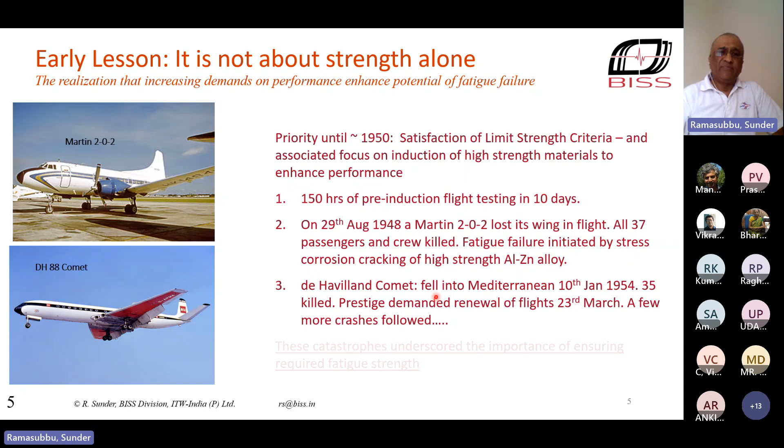You all remember, I'm sure this is an example cited very often, about the de Havilland Comet, which was the first jet transport aircraft, developed by a company in the United Kingdom, that eventually turned out to be a catastrophic experience because it took off with a lot of fanfare. We had the first crash in January 1954, killing everybody due to explosive decompression in flight.

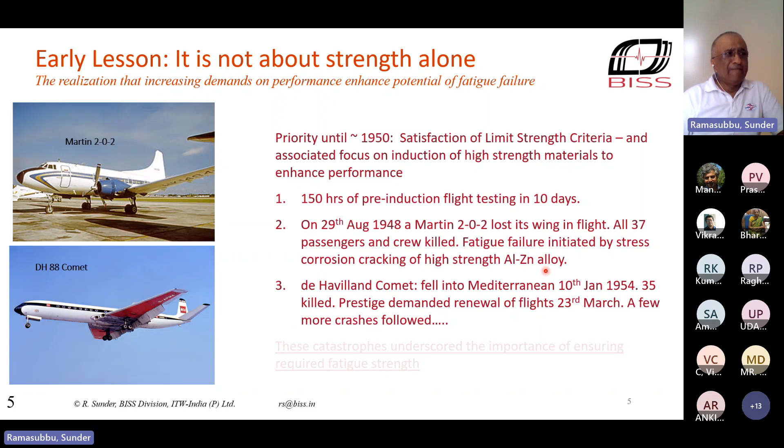Prestige didn't allow the company to stop flying without finding out what went wrong, and another plane crashed. So it followed that there was a fatigue problem with cracking of the fuselage due to the pressure cycles, because it was a pressurized aircraft flying at high altitude. So these essentially involved cracking for two different reasons.

The first one had to do with stress corrosion. The second one had to do with poor design and fatigue.

But I must note that if you look at the documents and lectures about the Comet, the discussion is about square windows and how a fatigue crack would take off from the corner. But actually, the catastrophes happened and testing showed there was a hatch right above the cockpit that used to break up. That was also a window, but it was not one of the passenger windows typically shown in pictures.

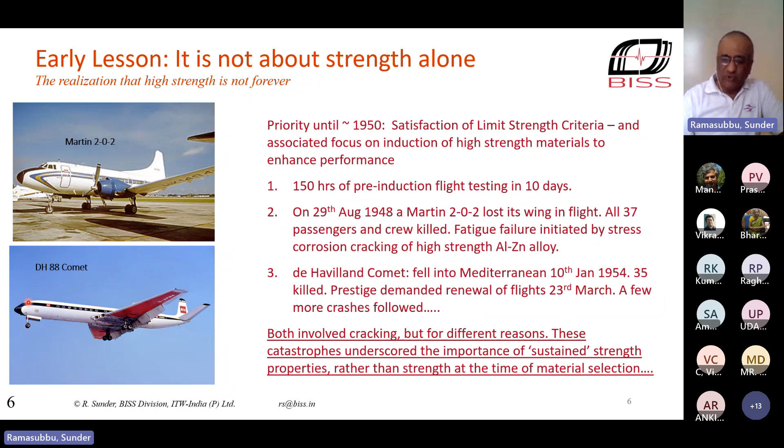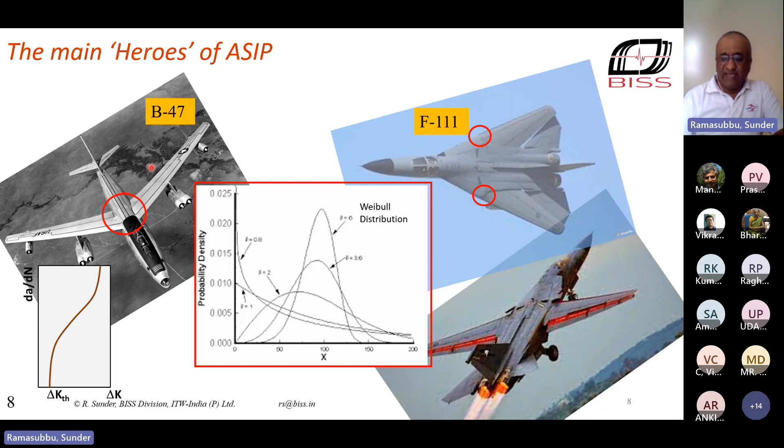So these were the lessons that led up to what happened a little later on, and we have the experience of the U.S. Air Force, which was the largest user of aircraft, not the producer, but the customer for aircraft. They had the real true heroes of the background for what forms the foundation for aircraft design today and for all safety critical structures, not only aircraft, but in the nuclear industry, the power industry, even in wind energy today. We use the same concepts that came down from heroes like this, which I will talk about in this part of the lecture: the B-47 strategic bomber, and then the F-111.

This B-47 was a very important aircraft. About 2,000 of them were built, and it used high strength materials in design. The specific salient feature of this aircraft was that it was the first high-speed swept back wing. You can see the wing swept back like on modern aircraft, a very sleek wing that used to see severe fatigue loads because of the flexure of the wing, and the center plane of the wing, shown in this region, would have fractures in flight.

We keep talking about certain aircraft which we consider to be extremely unsafe, but just imagine that on this aircraft, out of the 2,000 that were built, about 200 crashed because it was a strategic air command aircraft carrying nuclear weapons. Some of them actually were shot down over Soviet territory, over North Korea, I think even off China in those years. But those shot down were hardly 5 or 6. 200 were lost, mainly due to fatigue fractures at this part.

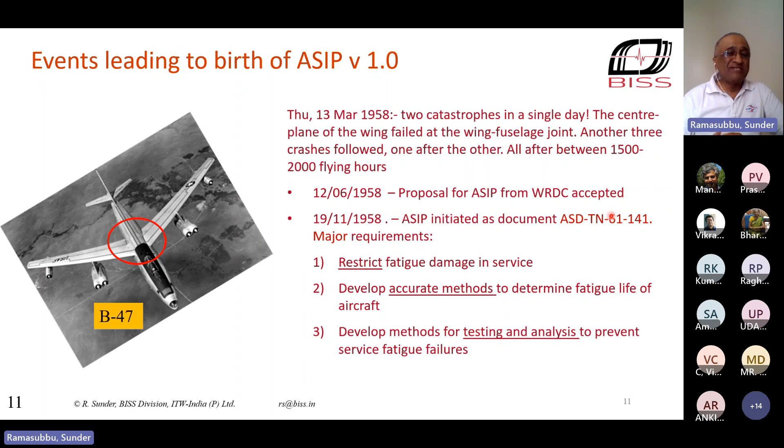The first requirement was that you have to restrict fatigue damage in service. He didn't say how you do it, but he said you have to do it, because until then aircraft were never tested for fatigue, only designed for strength. So imagine if you're an engineer who always uses ultimate stress, or at best yield stress, and now somebody tells you that you have to use a stress associated with the fatigue process. That becomes a kind of intellectual challenge for somebody with no experience in that. But that was the challenge posed by the first ASIP document.

Then the second recommendation was to come up with accurate methods to determine the fatigue life of aircraft, another interesting challenge. And the third was to develop methods for both testing and analysis to prevent service fatigue failures. So this was the first suggestion that an aircraft, before being allowed to fly, had to go through a process of full-scale fatigue testing. And of course, at that time, it was not really clear how you go about it.

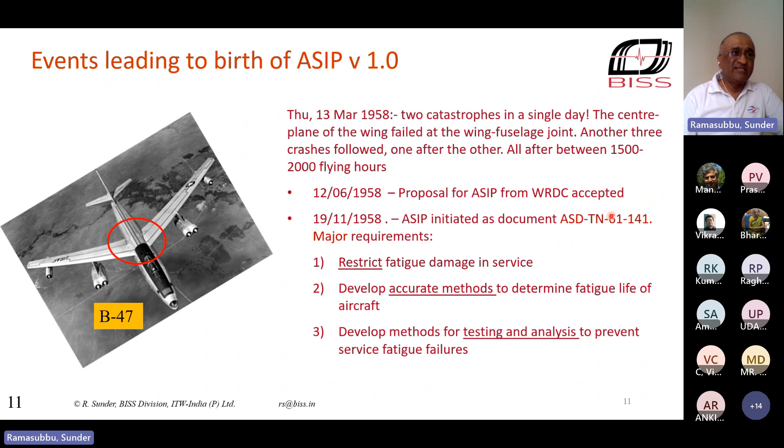So this is when really, in 1958, we as aeronautical engineers, as a community, started scratching our heads and wondering how to build aircraft that will last. Now the question was, fatigue failure is likely—when is it likely to occur, and with what probability?

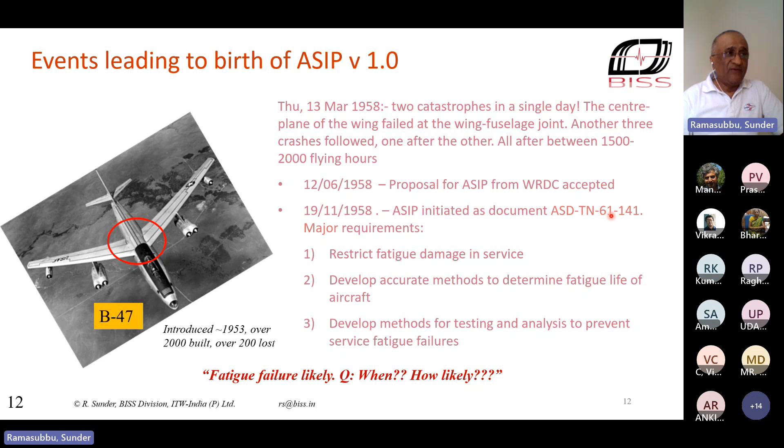So from a viewpoint of fatigue design, what are the kind of early lessons that came up?

The first lesson was we learned to work with probabilistic aspects of fatigue. The probabilistic nature of metal fatigue reflects the sum effect of scatter in material properties. You test the same specimens cut from the same material and they'll have a different life. Second, it could be deviations in manufacturing, defects introduced during manufacturing. And third, the differences in service conditions. So you have three different variables that affect the probability of a fatigue fracture, fatigue failure.

So it turns out, as I've shown over here, if you look at the Weibull distribution for probability of failure of different materials, aluminum alloys will have much less scatter in fatigue life than high strength steel. So immediately it turned out that if you're testing a steel structure, you have to use a different scatter factor by which you have to divide the fatigue life that you obtain, in order to tell someone he can use the structure for a certain period of time, whereas that factor would be less if it was aluminum alloy.

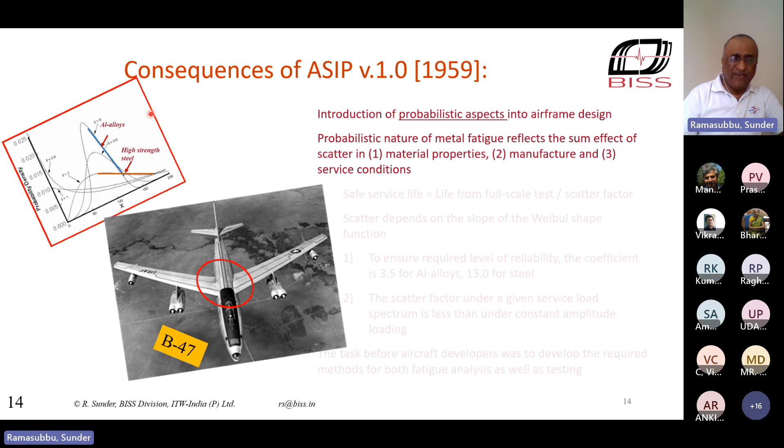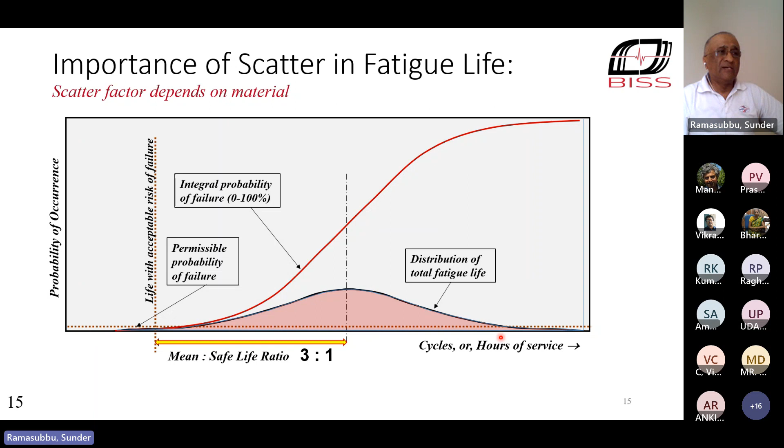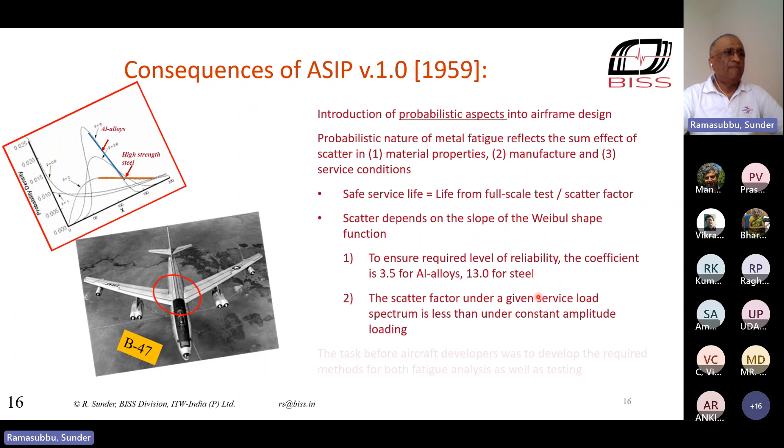However, in 1959 itself, they started thinking about introducing these probabilistic aspects in the aircraft design. And they said that you have to perform a full-scale fatigue test, do the test under conditions equal to the conditions of service, and then divide it by a scatter factor, which will depend on what material it is and so on. And the aircraft developers were now required to develop methods for both fatigue analysis as well as fatigue testing, taking into consideration these aspects.

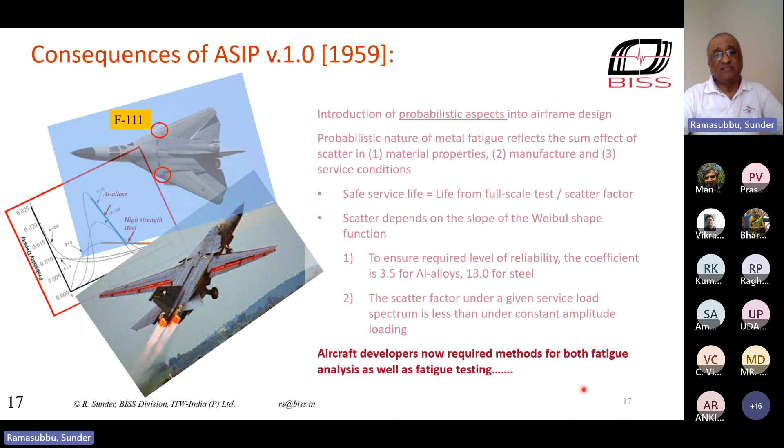Now, between the time version 1 of ASIP was accepted, not accepted but enforced, to 10 years later, a lot of things happened. And I would say the biggest hero we see now, not by way of a mistake like it was in the design of the B-47 and several other aircraft, but in the form of a solution, kind of an angel who came to really help things, is the subject of fracture mechanics. So the subject of fracture mechanics really took off around that time, the beginning of the 60s.

And to kind of underline the importance of fracture mechanics, you have to make a really serious mistake. And that serious mistake came in the way of the design of the F-111. The F-111 is a supersonic ground attack air superiority aircraft. What is special about this aircraft was that it is a variable geometry aircraft. So it has a wing that can sweep - it's a variable geometry wing.

So in accordance with ASIP version 1, it was full-scale fatigue tested. It showed a life of 16,000 hours. They divided it by 4 and said, okay, you can use it for 4,000 hours. Now, very early in service, there were two catastrophic failures in the tailplane. But unfortunately, they didn't set alarm bells ringing yet. They were later traced to fatigue crack growth from weld defects in a high-strength steel load-carrying joint in the tailplane.

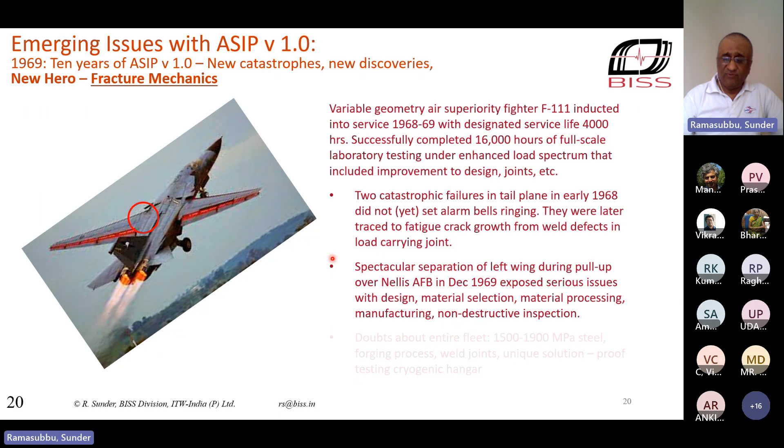There were doubts about the entire fleet, because this plane uses critical joints which handle the rotation of the wing, the tailplane drive. After all, these are stabilizers, so they can rotate. The joints and drives were all made of high-strength steel with ultimate strength of 1500 to 1900 MPa, produced by a forging process, and these were weldable steels. So all this together made life terrible.

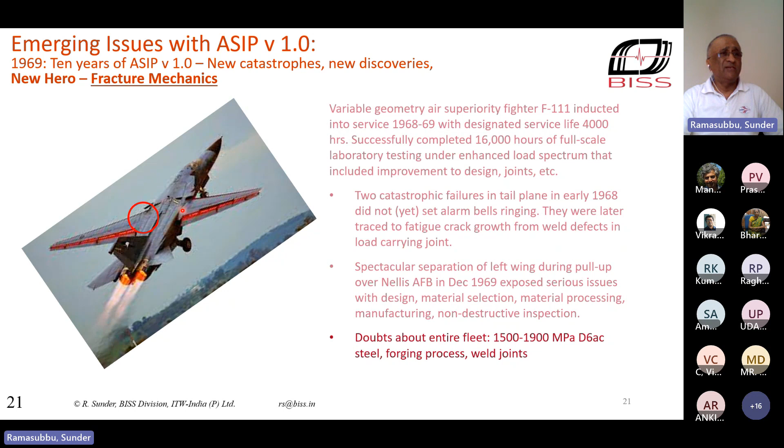The issue was really traced to the problem of just using high and ultra-high strength materials. Historically, before the 50s, the attitude of the designer was to use the highest strength material available, and that attitude did not change even after 10 years.

The problem with the F-111 was that it had what you can call rogue defects. That 100-hour fracture, or catastrophic failure of the wing, was because there was a rogue defect in the weld which caused early crack growth. That was compounded by the absence of residual strength estimates, because fracture toughness, though already well known in the science field, its importance wasn't appreciated enough in the construction of this aircraft. And there was no method available at that time for residual life analysis based on fatigue crack growth. So that was the situation with this aircraft.

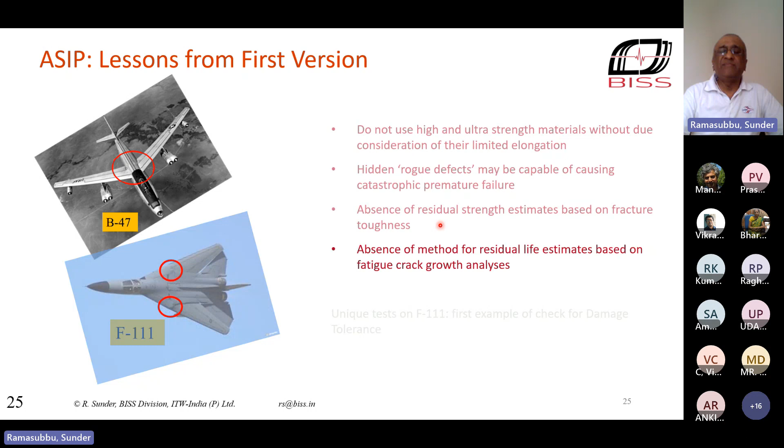But out of every lesson, something unique, something special comes out. Fracture mechanics in the aircraft industry really took off with a bang because you needed to know what will be the tolerable defect. You learned about the importance of detecting defects in manufacturing and in-service inspection. And importantly - because that's where I have spent my lifetime - you start learning how to compute the life of an aircraft between the time a detectable crack appears and the point when it's going to lead to catastrophic failure. But there was one extremely unique feature that came out of this lesson, out of this mistake.

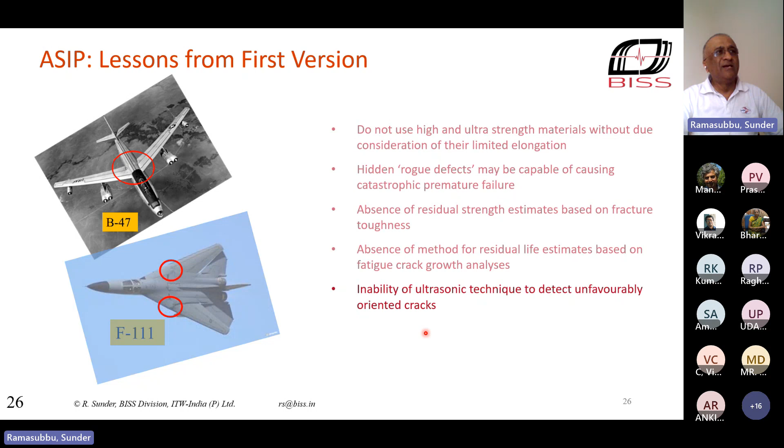You have to give due credit to the innovative attitude of our colleagues at the time. This was the first aircraft which was subject to a unique workaround. What was the workaround? The US Air Force built a special cryogenic hangar.

In that hangar, they decided that the entire fleet of 1,500 aircraft would be put to test for residual strength. In this cryogenic hangar, they took the temperature down to minus 40 degrees, and then they would apply a proof load. Keep the wing at 56 degree sweep, apply a load corresponding to minus 2.4 G and up to 7.3 G.

7.3 G means 7.3 times the flight weight of the aircraft in tension would be applied. Lo and behold, 11 of the aircraft actually failed the proof test, and this confirmed the criticality of the weld defect on the aircraft. So based on fatigue crack growth analysis, for the first time in aeronautical experience, the aircraft was cleared for 1,500 hours of service till the next inspection and proof test.

I think this is a very interesting example of how, even in a terrible situation, you can come out with some very interesting, innovative solutions. Because it was clear that at minus 40 degrees, brittle fracture holds the roost, and it's going to cause a premature failure. So this experience really gave birth to a new era starting from the late 60s.

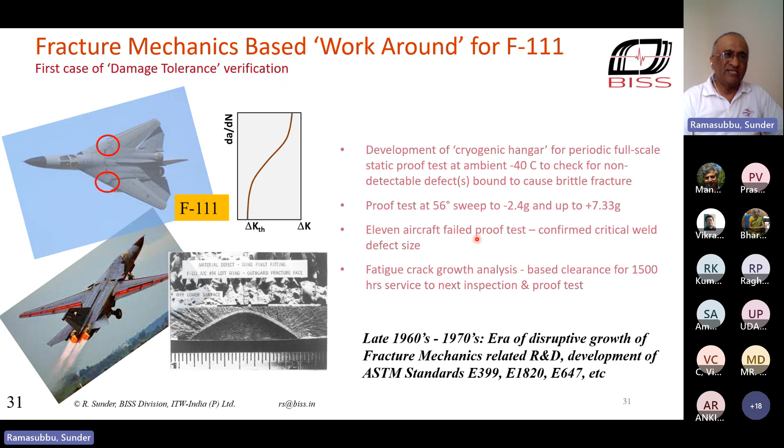The idea is very simple: if cracking is inevitable, we have to make the best of it. How do we make the best of it? We count on the crack as an indicator of condition. And if there is a crack of detectable size, we then look at how long it will take to grow, and divide that by a factor of 2 to assign the inspection interval.

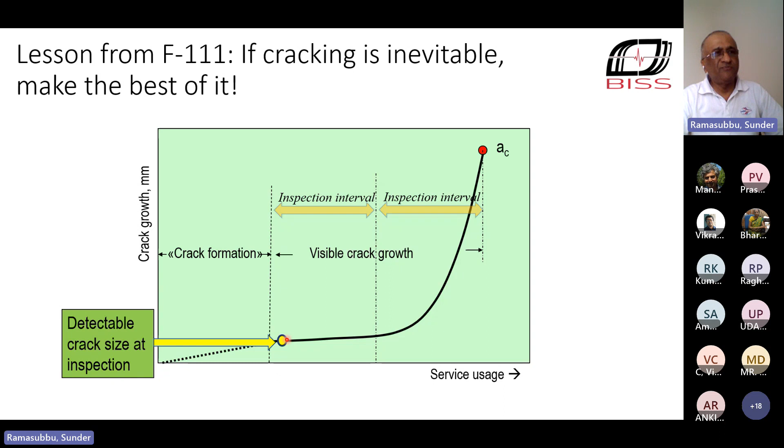This factor of 2 is not a safety factor. It is a factor which accounts for the fact that you might just miss detecting a crack when it comes for inspection of detectable size. If it is just smaller than that, then you have to provide for 2 inspection periods. So what is the advantage of this?

The scatter in fatigue crack growth life, this is the residual crack growth life, the scatter in that is much less than the scatter in fatigue life. And because of that, as long as you assign an inspection period, you're safe, and you can continue to use the structure for as long as it will serve without worrying about the possibility of catastrophic failure.

So fatigue cracks turned out to be assets in condition monitoring because they serve as a diagnostic parameter without inserting any special sensors. All you have to know is how to look for these cracks. They serve as diagnostic parameters for structural health monitoring, and they enable a transition from hard maintenance to maintenance on condition. And this made a huge impact on aviation as we know it today. I'll come back to this later.

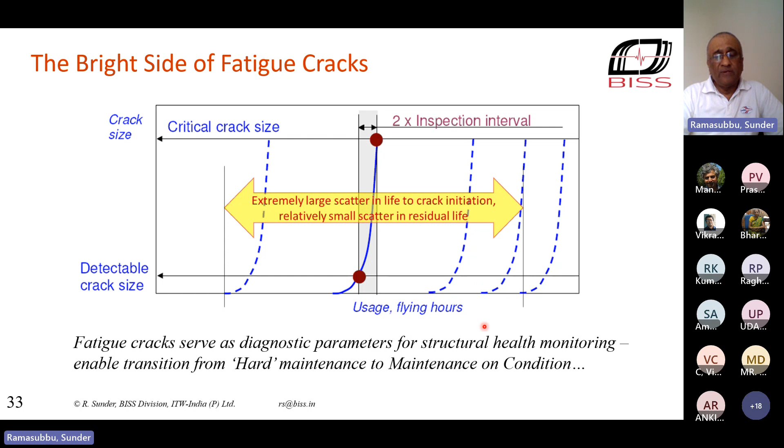But importantly, they also involved a lot of work around the world. And I can just show you examples of what happened in the US, because the work really took off in the US, because it was part of the aeronautical industry. The stress intensity factor became a key parameter.

And the magic about the stress intensity factor is that it's a similitude criterion. So if you compute stress intensity factor in any object, and you can test a specimen from the same object in the lab and understand its properties, you can now extrapolate it to any structure. That was a huge advantage.

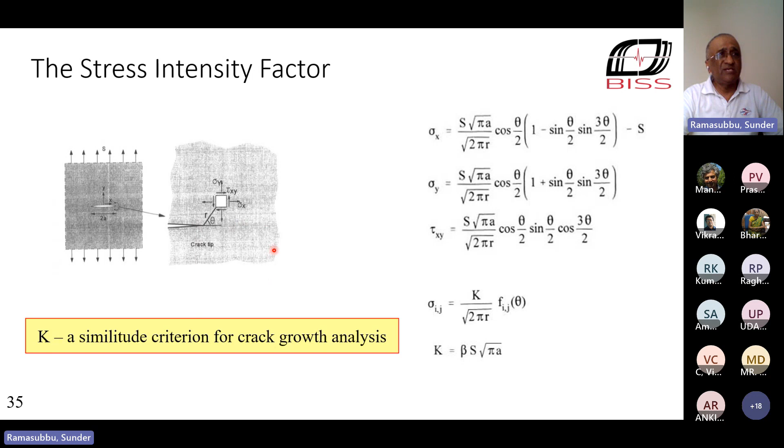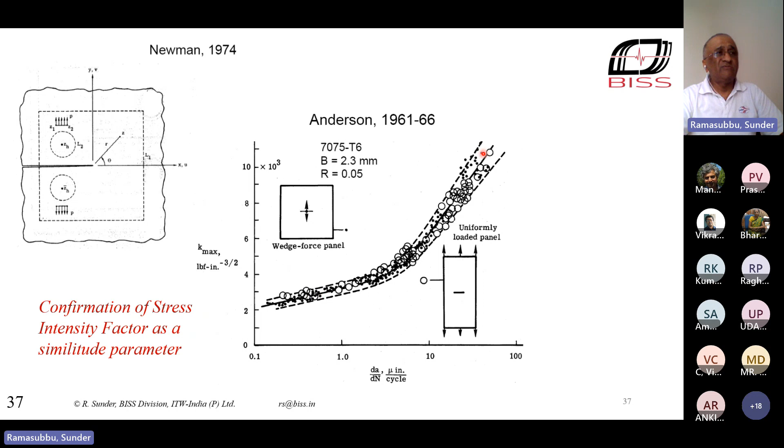They came up with studies to confirm that the stress intensity factor is a similitude parameter. You can see here test results from a wedge loaded geometry where stress intensity will come down with crack size. As crack size increases, K will come down. In a center crack, it will keep going up. But if you plot crack growth rate versus K, all the data fall into a single scatter band. It's a huge advantage, which I'll come to once again.

They performed a theoretical analysis and proved on testing that if you stiffen panels—and aircraft wings and fuselage is all about stiffened panels—if you stiffen panels in a particular way, you can have the K function controlled in such a way that you can prolong the period of crack propagation. And these features are standard fare in absolutely all aircraft today.

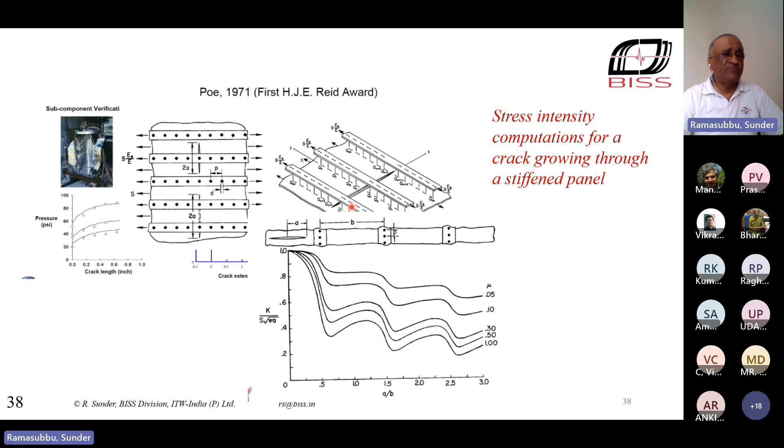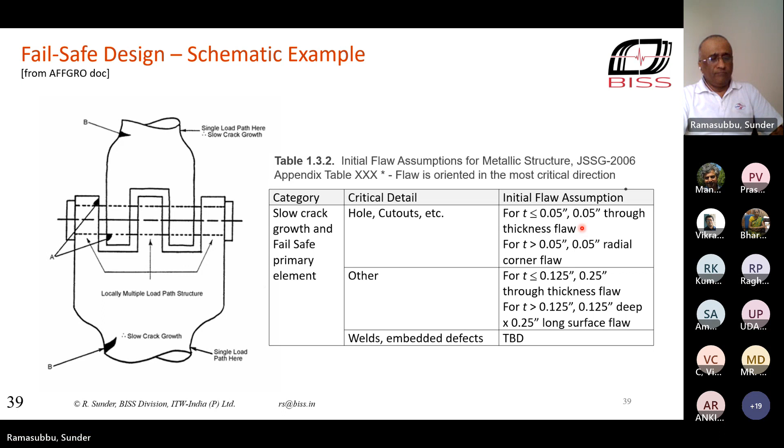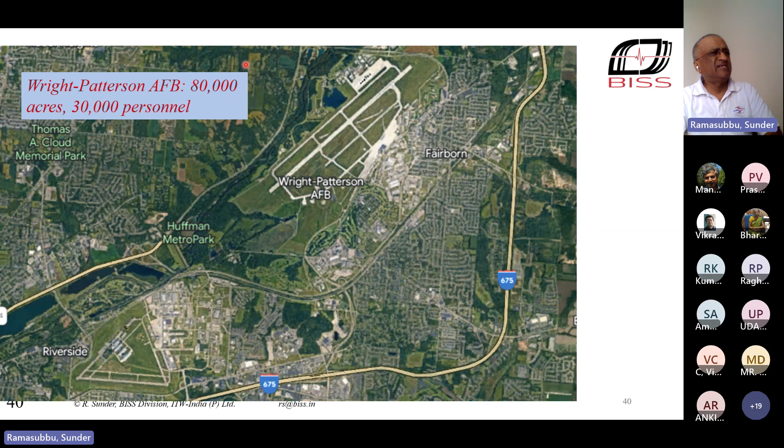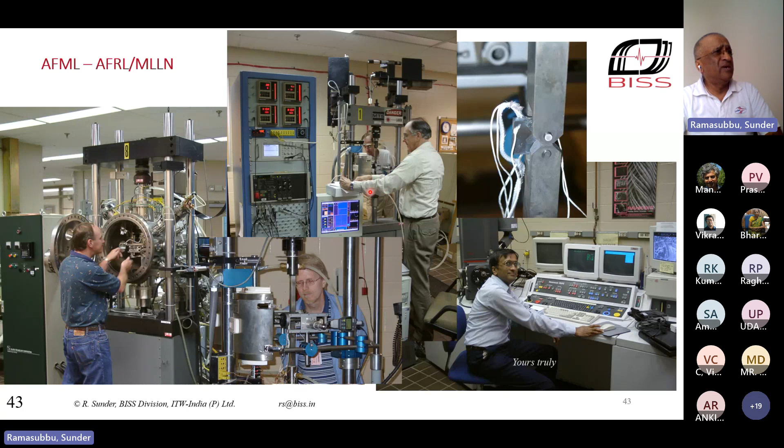At Wright-Pat, there's a satellite image of the Wright-Pat Air Force Base. It's a huge facility, and the lab, the Air Force Research Lab, is located over here. I had the opportunity to work there for a couple of years, and I remember the amount of work that went on high temperature materials, even while I was there, for engines.

In short, this work over there at Westinghouse gave birth to ASTM E647 and even the fracture standards across the world, even in India, that essentially has turned into an industry. I would call it the fracture mechanics industry today, where you have basically four platforms which together deliver solutions that render safety critical structures safe for indefinite usage.

So this industry serves safe usage of structures around the world, and it came out of the history that I briefly described to you. There are other elements in that history, of course, but I thought I would pick those examples which stand out. Now, today, a lot of industries are moving to composites, and the question is, how do you deal with composites?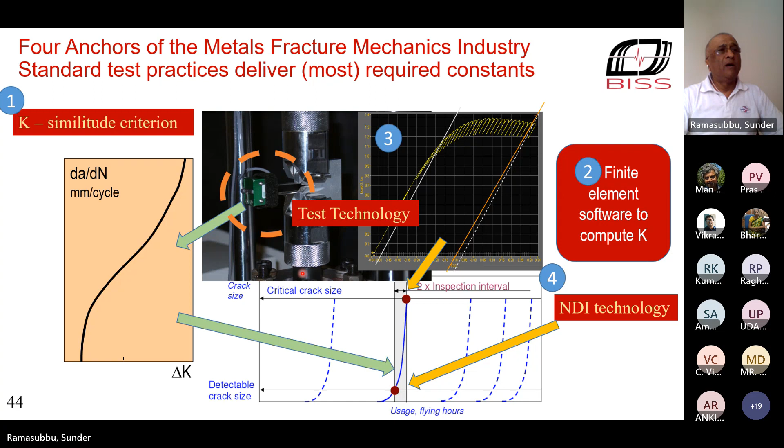Composites are a different ballgame altogether, but we don't have a similitude parameter for composites. We don't have a method to track damage growth in composites during a test. In fact, in our company, we developed a scanner with which we can get these plots that you can see over here. Perhaps one day this will be a platform as well.

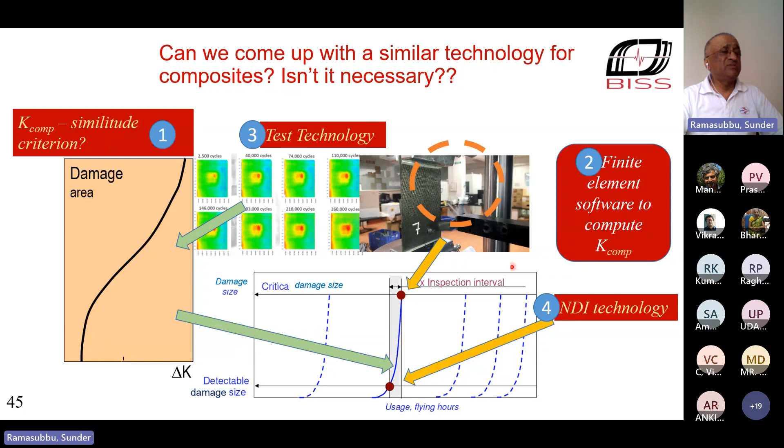I don't know, but it's going to be important. And because you are able to look at defects and the way they grow, you can also talk about the risk factor in using structures with cracks. So you can look at the statistics of how cracks will be, what's the kind of distribution of cracks you will have in the safety critical structure, and how that distribution will change with service.

And you can translate that into risk analysis. That is to say, here is the risk of using this structure, risk of failure, and in the log scale, in a million, how many in a million will fail. And then you do an inspection, and after that, your risk drops and it again grows after that. And what you can do to deal with your management in the organization to take important decisions.

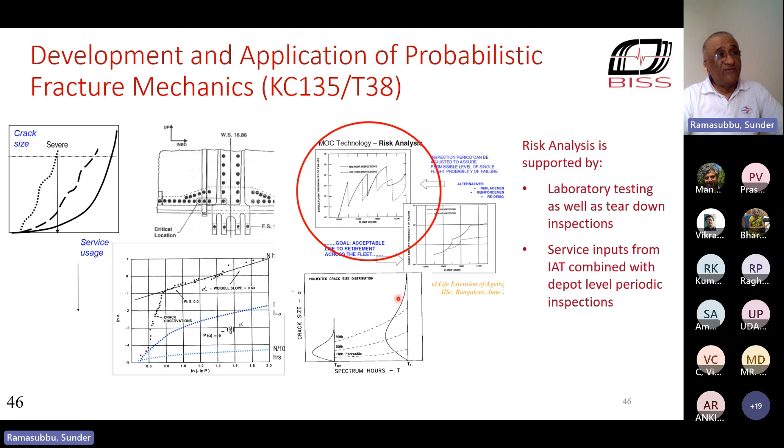So such risk analysis is supported by lab testing, by tear-down inspections of old aircraft, and by service inputs from individual airframe tracking combined with depot-level inspections. The advantage of this approach is that instead of looking at a distribution of fatigue life, you can narrow it down considerably to a distribution of residual fatigue life, which really governs the periodicity of inspections rather than the time when you have to discard the structure.

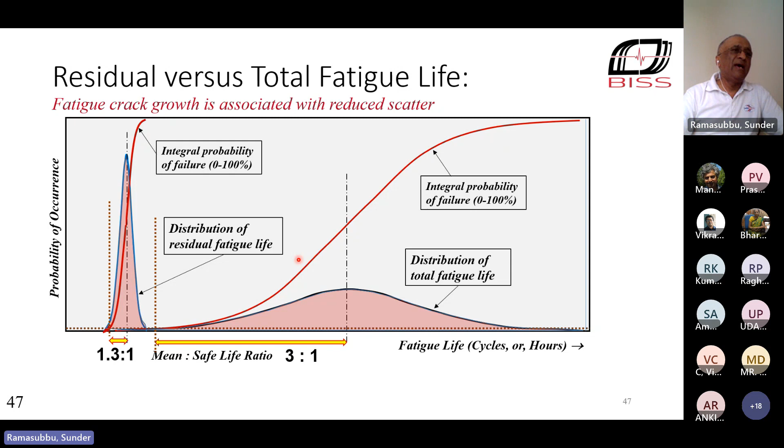So it's a huge advantage. And using this advantage, you can then look at how you can take into account variation in one important factor today in service, which is the variations in service conditions from aircraft to aircraft. And if you can do that, you can get the distribution of variation in residual fatigue life because of service conditions and take that into account and adjust your inspection periods. So this way, you can considerably increase the economy of operation of an aircraft and of any safety critical structure for that matter, and at the same time, not compromise on the safety aspects.

With aircraft, you have a huge advantage which you don't have with other structures. And that is that each aircraft comes with a flight data recorder that records all the parameters, whether you want it or not, they're all there. All you have to do is extract them, both for the aircraft as well as for the engine.

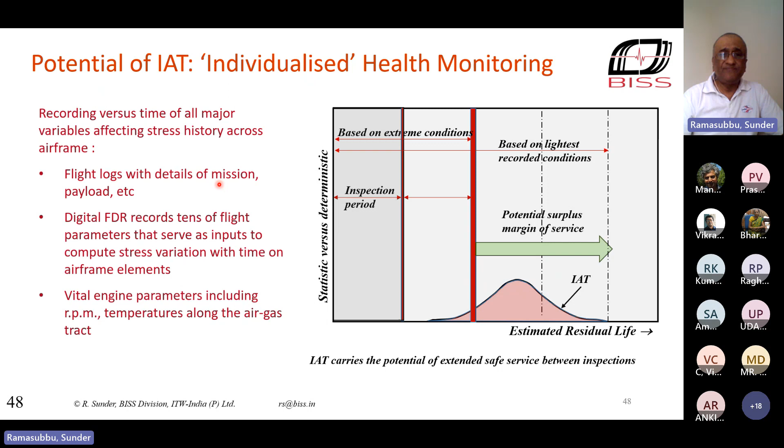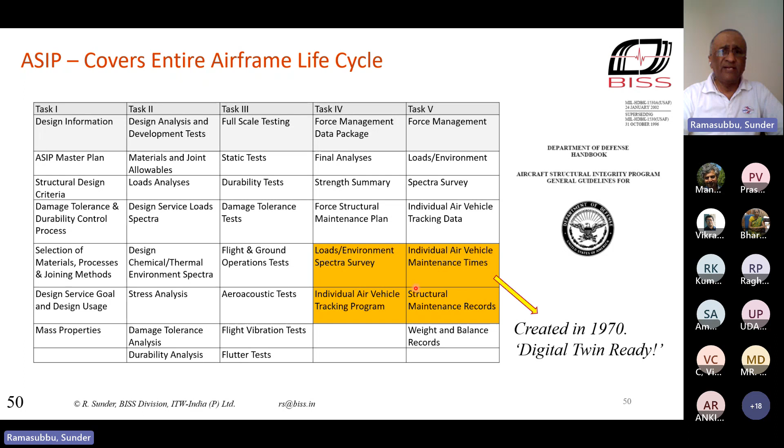Now let us look at what has happened after that. This is the latest ASIP, what the document says. This was created in 1970, and you can see that it covers the entire life cycle of an aircraft from design right up to retirement of the aircraft. And I'm highlighting here elements which allow you to develop digital twins. This was created in 1970, so pretty much up to date.

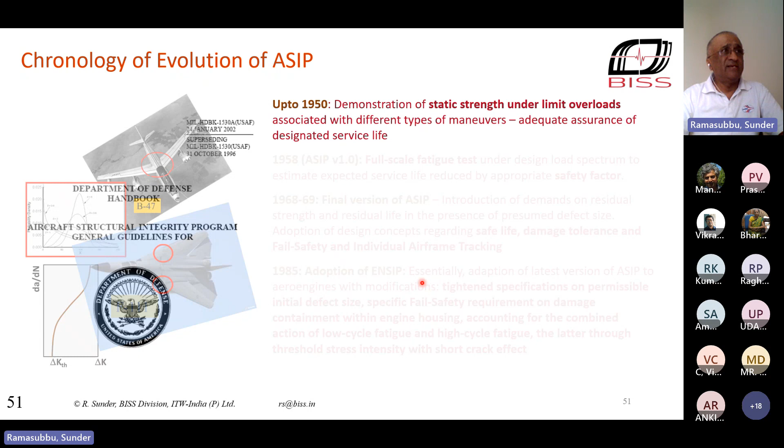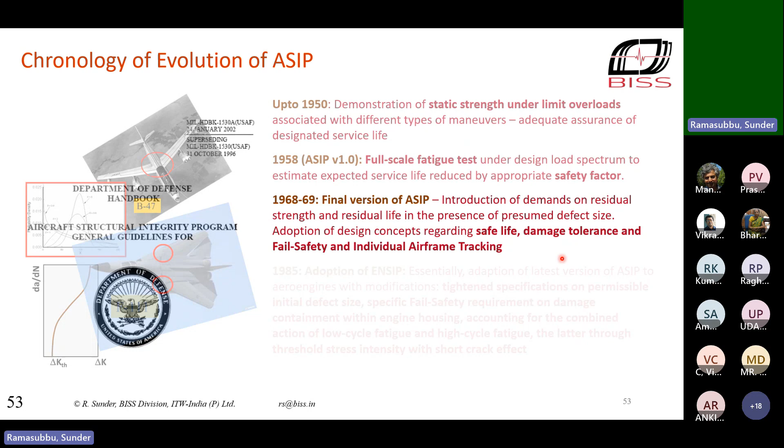So very briefly on the chronology of evolution of structural integrity program: up to 1950, you had the importance of demonstrating static strength under limit overloads. Then came the first version of ASIP, which was grossly inadequate, as you saw. And in the late 60s, 1970, the final version of ASIP was adopted, which includes considerations of safe life, damage tolerance, and fail safety. And very importantly, it includes individual airframe tracking to make sure that you're able to look at the health of individual aircraft.

In 85, ENSIP was adopted, which covers aircraft engines, and also the fail safety considerations for engines, which is a very important factor because engines are actually flying bombs. They're very high pressure. Today's jet engines, the compression takes the pressure right beyond 40 atmospheres pressure. So you can imagine at high temperature, 40 to 60 atmospheres of pressure can be a flying bomb.

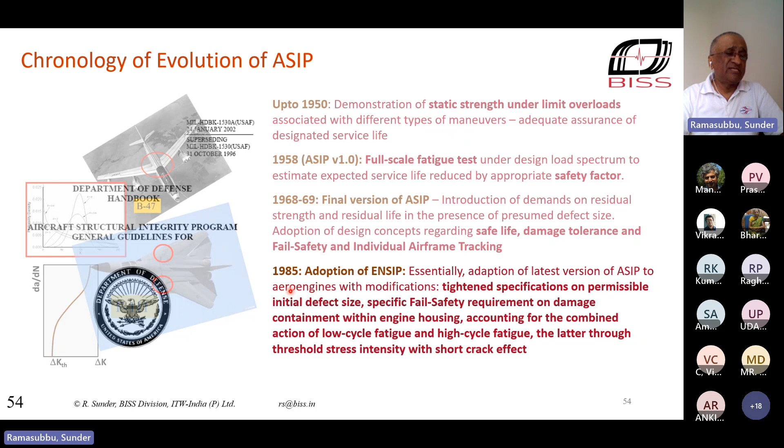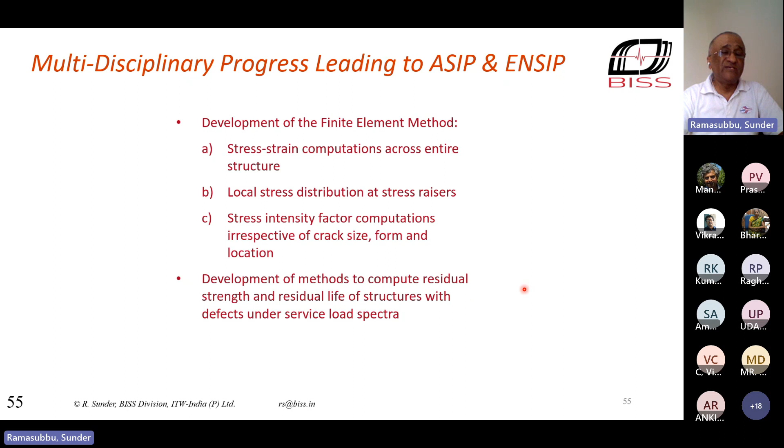Now, what are the things that allowed all this to happen? On the theoretical side, first place definitely goes to finite element method, which solves a lot of issues, and the development of methods to compute residual strength and residual life of structures with defects under service loading conditions. And we can't underestimate the importance of the experimental resources that are required and which are there, that is the development of test systems. Our company, my own career was built in the last several decades on this area.

The generation of MIL-Handbook database, which is only possible from experimental data. The development of test technology, which can basically reproduce service conditions.

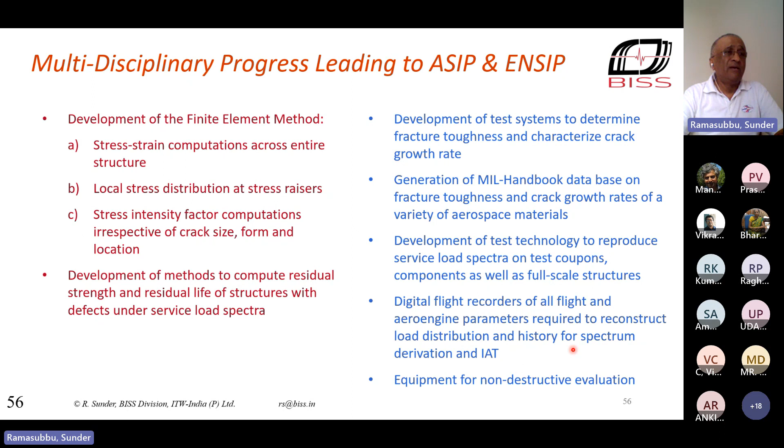We can say now that in a full-scale fatigue test, if you can imagine the aircraft had a mind of its own, it would think that it's flying, because it will see practically load by load all the loads that it sees from takeoff to landing and from flight to flight. You have digital flight recorders today, and very good equipment for non-destructive evaluation, which got a huge boost thanks to this industry.

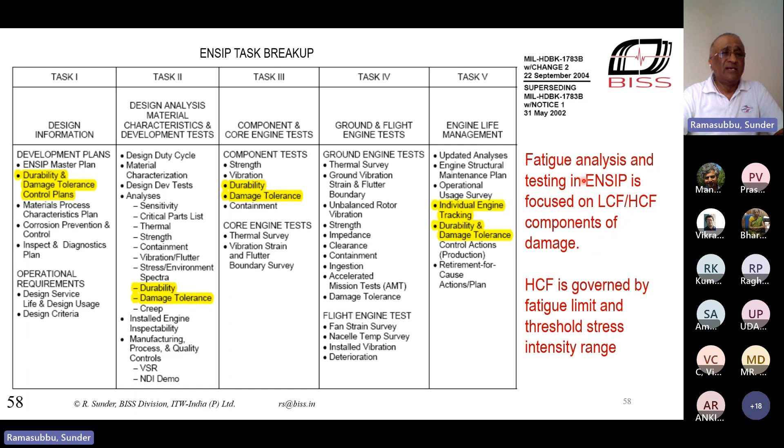Now, briefly about the Engine Structural Integrity Program. It has the same structure as ASIP, but the important difference here is the focus on low cycle and high cycle fatigue approaches to fatigue life of engines, because they are rotaries. They rotate at thousands, from a few thousand to a couple of ten thousand RPMs. If there's one load cycle in each of these due to some reason, you get a huge cycle count, unlike an airframe.

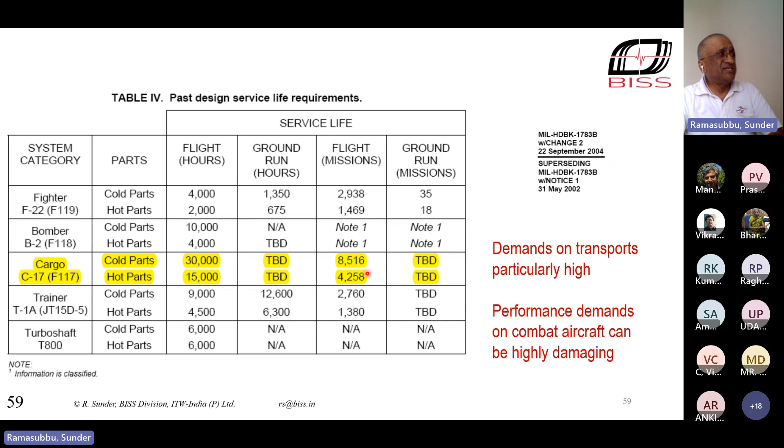You can see here for transport aircraft it's quite huge, and at the same time there's a huge demand on defect sizes. In aero engines, you do not allow defects even as small as these, which means you need, on one hand, non-destructive equipment that can handle detection with almost 100% probability, detecting very small defects because they can grow rapidly. Engines are very highly stressed, their safety factors are even less than airframes. You need to look at non-destructive inspection as well as threshold stress intensity and fatigue limit considerations, which are not the only parameters in airframe design, but here they become extremely critical.

Very importantly, both are sensitive to applied stress ratio. This has a particular connotation to us as a community in India, and I'll come to that in a moment.

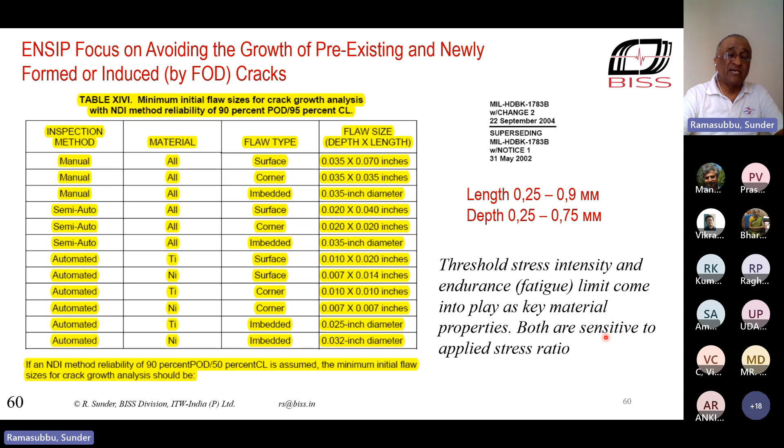The ENSIP document specifies how to calculate permissible and detectable defect size. There are two important parameters here: one is the threshold stress intensity range, and the other is the endurance limit. There is a very complicated, convoluted process to determine how fatigue limit varies with mean stress or applied stress ratio. But in engineering practice, there is no standard method to characterize threshold stress intensity range as a function of applied stress ratio for initial defects.

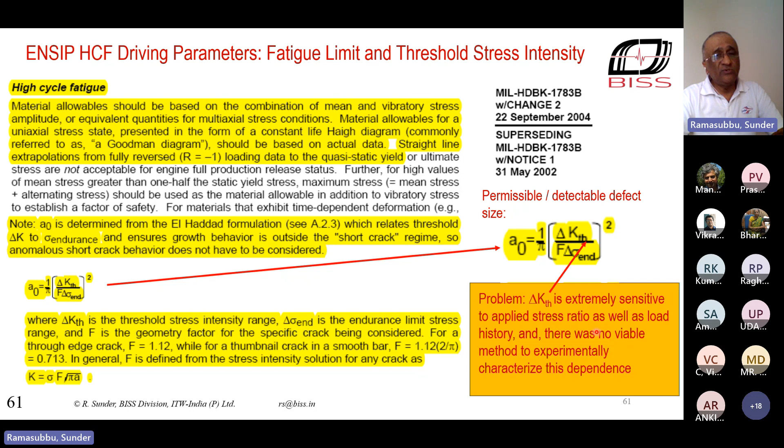This is very important because initial defects don't see the same conditions as cracks grown in experiments to find out threshold. In lab experiments with long cracks, you get a very different threshold. I'm delighted to share that some of you may not be aware that ASTM is carrying out an interlaboratory study right now, and we hope to finish it this year, to come up with a new testing practice, a new test method that characterizes threshold stress intensity as a function of applied stress ratio.

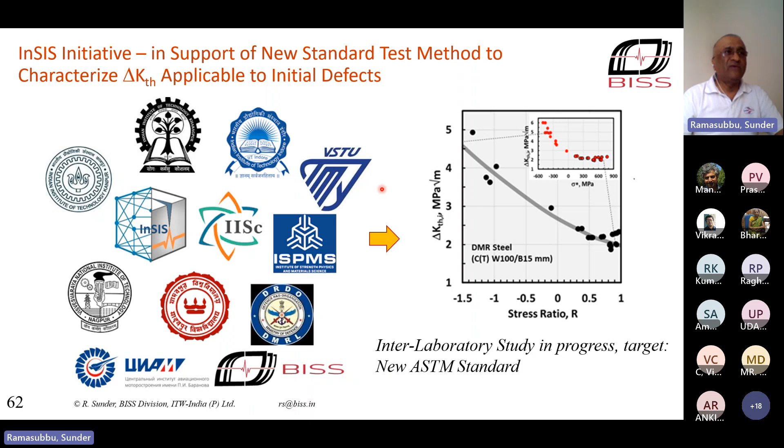We have results already on a naval steel, which we got from DMRL, and a number of Indian institutions have got together along with colleagues in Russia. We hope to come out with results that will convince the American Society for Testing and Materials to adopt this new method as standard practice. So we hope to have a made-in-India test method that will be used globally, and that will have a huge impact on the determination of permissible detectable defect size.

The target is to close this work this year, so perhaps Raghu Prakash can set up a seminar sometime towards the end of this year or sometime next year, where we can all look at what was achieved.

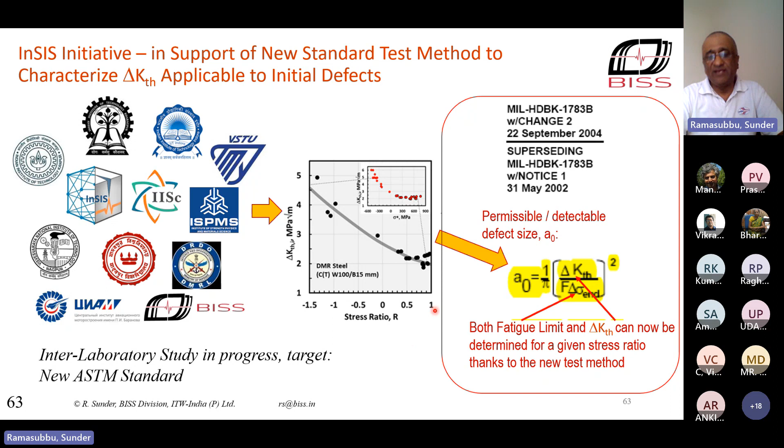Even though ASIP and ENSIP are already in practice and in use, there are lessons that keep coming up. One terrible lesson we learned back in 1989 was the case of the Sioux City crash landing of an aircraft, where the engine practically exploded. Then, as Murphy's Law would have it, the tail engine exploded and messed up the controls of the tailplane. The pilots had to practically try and land the aircraft using just these two engines to maneuver it. Half the passengers died, but half survived, surprisingly. The aircraft landed at a speed of about 450 kilometers per hour, so you can imagine the consequences.

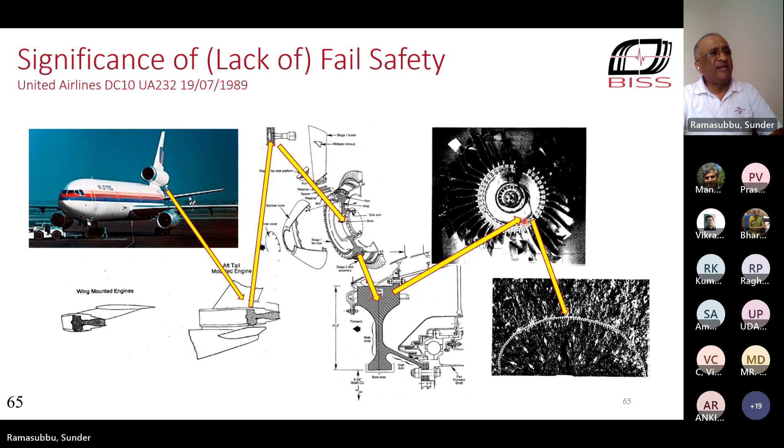That failure was traced to a small 25 micron defect in the titanium disc. The consequence of that was triple vacuum refinement of casting. Today, we don't have those defects anymore, and there was the introduction of a fail-safety requirement of containment. So today, you cannot develop an engine if you cannot demonstrate that when something breaks inside, the engine will not explode.

So that's the fail safety requirement for engines, came in part from this problem.

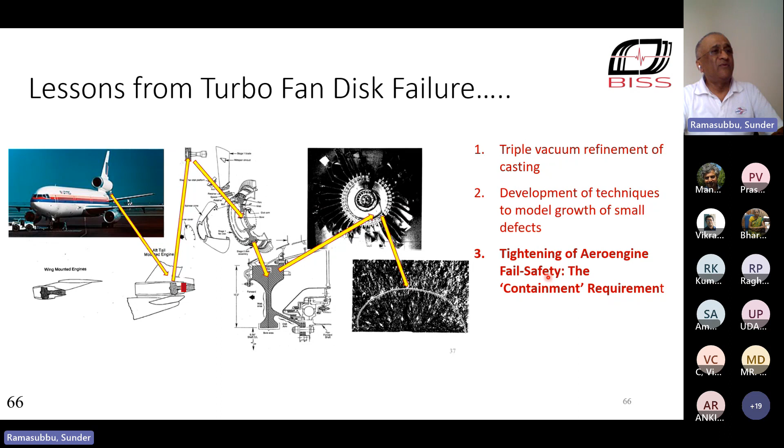Many of you would have seen this picture of the Aloha Airlines Boeing 737 that lost part of its top fuselage at high altitude due to explosive decompression. That's when we understood the importance of multi-site damage, where a fatigue crack can simultaneously take off from multiple points. When you do analysis of fatigue cracks for a structure, you only look at one crack, but here you had a string of these cracks that strung together and caused a catastrophic failure.

But I look at this as an optimist, I'm an eternal optimist. I look at this also as a sign of fail safety. After all, the aircraft landed.

Can you imagine, looking at this picture, how great it was that all the controls for the aircraft went through the floor and not through the roof? Because if they had gone through the roof, this was definitely going to crash. The structure had sufficient residual strength to withstand the impact load of landing, in spite of having lost this part of the aircraft.

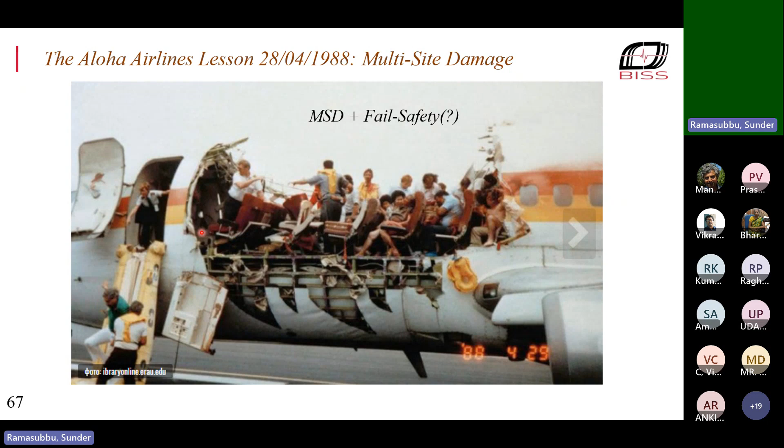There are other situations where, during inspection, a crack was missed out, and as a consequence, this particular blade flew out. As Murphy's law should have it, it went and penetrated the window of the aircraft and killed the passenger sitting next to the window. That would not have happened if that defect had been seen at the previous inspection.

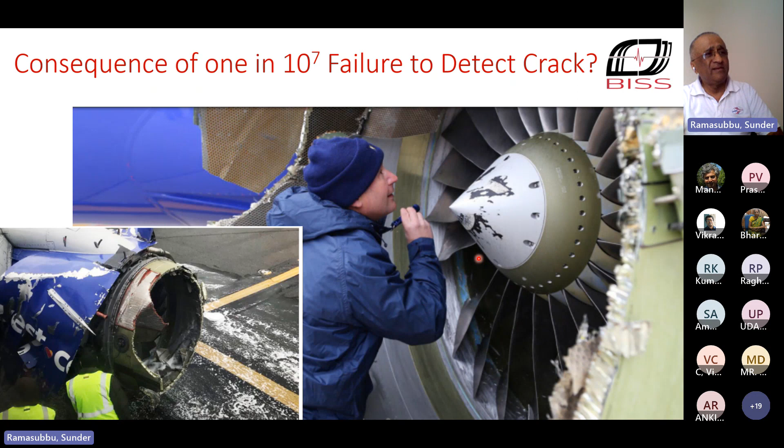And there are issues like this, where the turbofan disc practically is shattered. Unfortunately, the engine basically lost its turbofan, but fortunately it didn't cause catastrophic failure, and none of these blades went into the fuselage to cause explosive decompression that could have been catastrophic.

The issue here is we are dealing with very high stresses, we are dealing with good materials, we're dealing with very sophisticated methods for analysis and for testing. I think the message I would take from this is that we have to get more and more aware of the basics and reinforce those foundations so as not to repeat mistakes. That is the most important thing when something terrible like this happens.

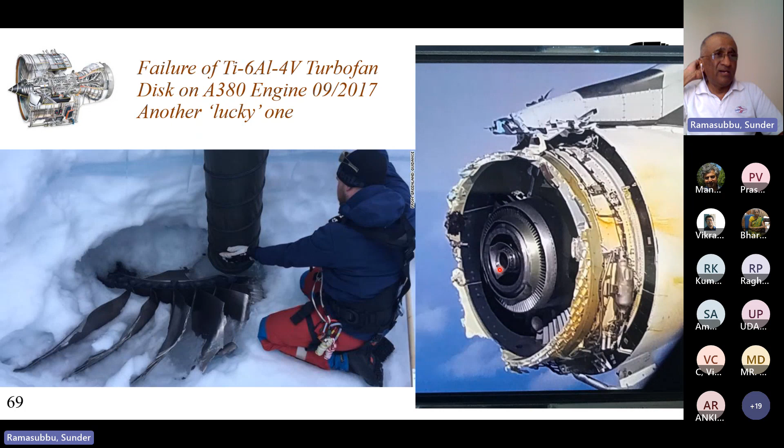For the ASIP program, the US Air Force is probably the only agency in the world which organizes annual conferences where scientists and practicing engineers come and share their experience, every year, ever since the ASIP program was adopted by the US Air Force. I think this is an example of how scientists and practicing engineers can collaborate to really improve the quality of what the industry comes out with.

And this is a lesson for us as well. I'm a little disappointed that even though we operate one of the largest Air Force fleets in the world, we don't have that kind of activism in this field, which would give a huge opportunity for academic institutions to get involved with research of practical importance, on which they can get good funding, as long as we can convince the Air Force that it's worth investing in these things.

But let us look at the positive side. Look at an aircraft like the 747. It's probably one of the first aircraft that benefited from the knowledge that came from fracture mechanics of the 60s. Now, would you believe that this aircraft does more miles on the ground over its service life than most of us do on our cars before we sell or discard the car? It does 240,000 kilometers.

This is my estimate based on the kind of service life many of these aircraft have. And if it were to fly around the equator, it could do 2,500 orbits and still keep flying. So that tells you how reliable the aircraft are. I fly very often, and I can tell you a thought never crosses my mind about how old an aircraft is, because I know that it's safe.

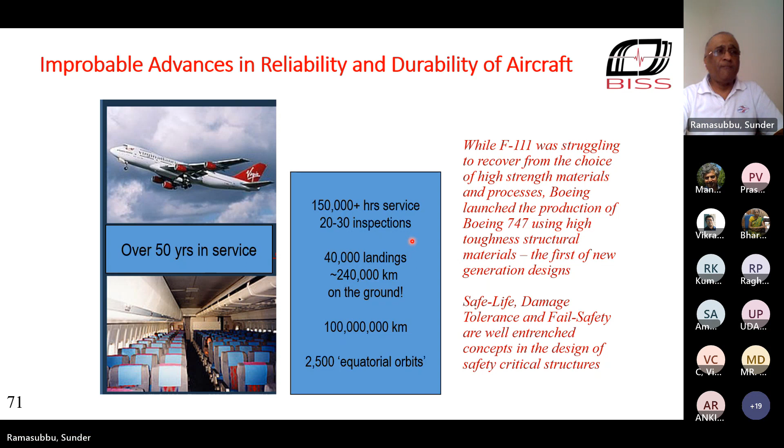Engines too are getting more and more reliable, and even I, as an aero engineer, find it difficult to believe that the specification today is for a top-notch engine to serve for 10,000 hours. That's 2 years of usage between inspections.

It's amazing, and the kind of knowledge that has been accumulated, the experience, it's there for us to see. It's so reliable now, the engines, that for flights across oceans, you don't need 4 engines on an aircraft, or 3 engines. 2 engines are good enough, and they're considered reliable enough to carry you across the Pacific or the Atlantic Ocean.